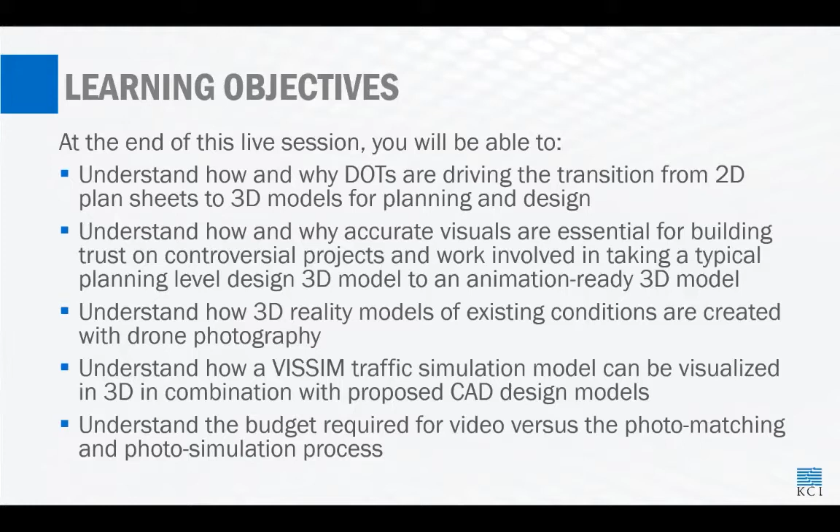Understand VISSIM traffic simulation and how that can be visualized in 3D through an example we showed today. And talk about the budget and understand the differences in products that you can create appropriate to your budget to communicate.

I want to focus today on 3D transportation visualization. These are the 3D data products that are becoming more and more available, and 2D products are something that I think we all see often with the aerial photo in the background. It still is a 2D and not a real view that you'd actually see in real life.

Public involvement opportunities are out there with this 3D data that's out there, from concept planning all the way through final design and construction. I'll talk about some of those phases of different ways to use products.

The target audience, it can be the whole general public, like open to the public, specific people and agencies who are decision makers, focused community groups. It's up to the client, typically a DOT or agency, or whoever's funding the project, to determine that and focus on that.

Goal is to honestly show in the way it's actually going to be the benefit and also the impacts of projects, which of course people with transportation are always concerned about new traffic patterns and how that's going to change. And that's where the VISSIM, you'll see, comes into play.

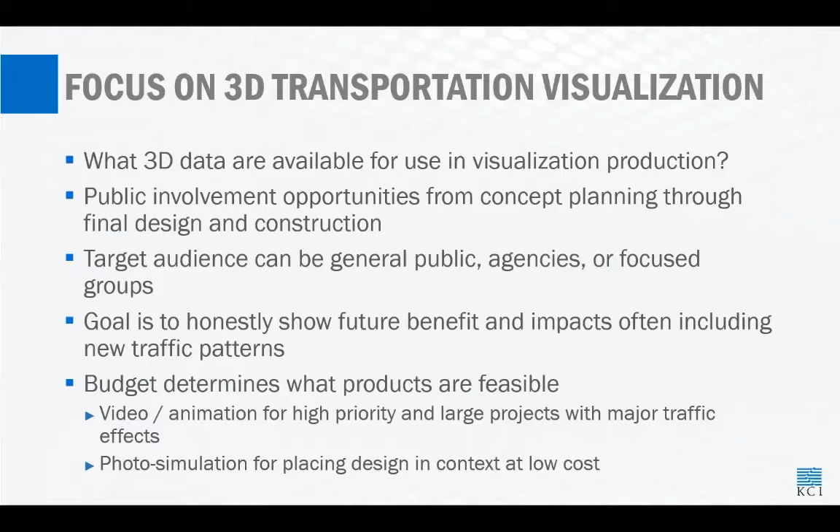As engineers, we're always looking at 2D, picture type of engineering views. Photo simulation is how people actually can see and recognize things. And that's a big priority, is making everybody understand, or as many people as possible understand, what the future is going to look like given a major project, and how to usually get them on board with the benefits.

So the different opportunities where it's going to be appropriate to involve the public or involve a target audience, to me that kind of is the same category. You're taking someone who's not an engineer, people who are going to be part of living the project, they're interested in it, or the agencies and groups that are kind of stakeholders.

You can start out in the very beginning. You have things like visioning, a technical assistance plan in these community groups that are looking at way into the future. And also they might get involved with influencing, or any town or city has comprehensive plans that they put together, depending on how big the city is or town is, how detailed they sometimes go. But they all have their own comprehensive plan, and that's an appropriate place to use some of this 3D visualization.

A big one focus on today is NEPA. So this was signed in 1970, Nixon, and that's kind of was as a result of an awakening, or more of a concern, especially about impacts of projects environmentally, but also on the social and economic effects. And that's what the law says. You need to look into those alternatives, because underlying everything with transportation is eminent domain.

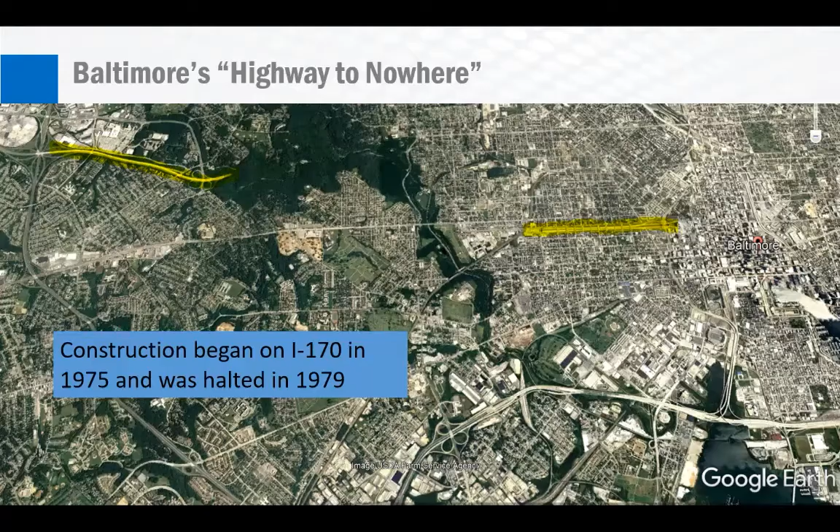What happened over time is that the project, even though it was getting built, had a huge community blowback, where they didn't like this project. It had a lot of impacts to the community, but also environmentally. It was destined to go through here, and because of all those things, the project was halted. So it's the famous highway to nowhere.

Now, here it is, and these are Google Earth images. The MARC parking in 1994. So this highway to nowhere went to here, but there is a MARC station here, a pretty important stop connecting to Baltimore. So they had the parking lot in 1994.

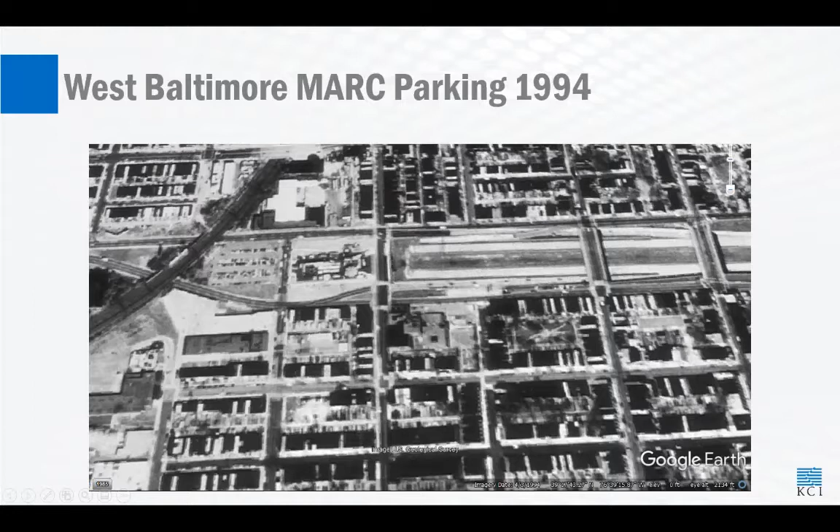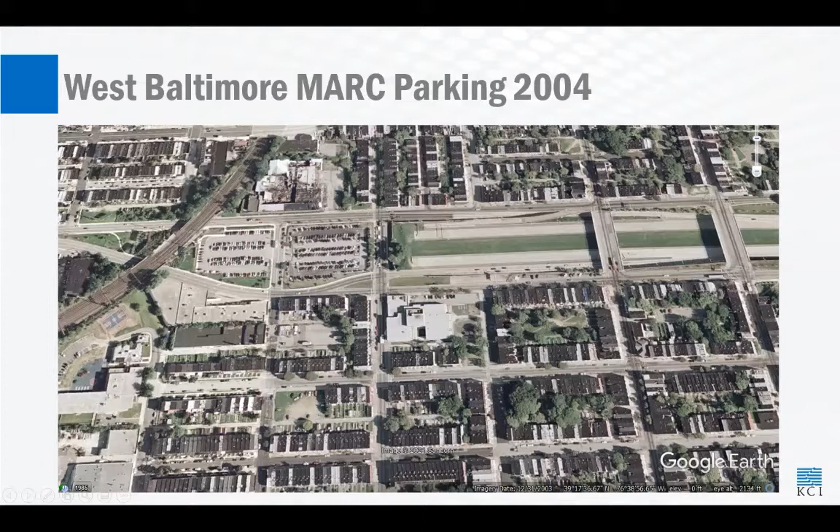And here, of course, is the highway to nowhere. Going forward, they expanded it, and you can see it's totally full, because it's a good commuter route. So we start to see opportunities now to take this and turn it into something that will help the community connect, giving economic opportunities through the traffic and getting people in there.

A lot of people worked on it. And this new parking lot, and then the ramps were all adjusted and a lot of roadway work in order to make this road connect. But what we got now is a large expanse still remaining of the highway to nowhere.

So we skip forward to today. There are people working on visioning of what to do with the rest of this now. It's essentially turning it into more parking garages, businesses, connecting instead of having non-connected communities here. There's a lot of ideas going on.

And these are opportunities that are mixed intent - like in the planning, in a comprehensive planning stage, you're planning for economic benefit, environmental and community benefits. It's not just about transportation. So it's kind of neat - that's how it's evolved with transportation.

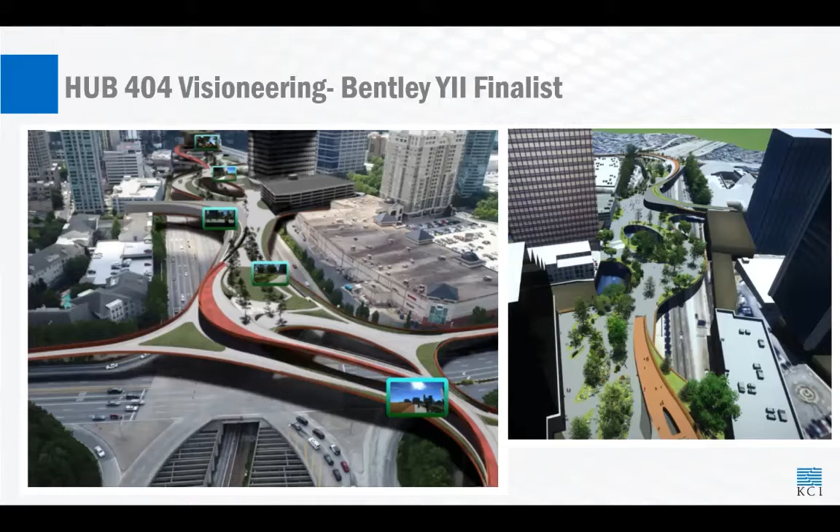It started off more transportation focused, and then it became more about the context of the community, the context of where you're putting all this stuff. Here we've got this Hub 404 Visioneering, which was a Bentley finalist project, and James Clay worked on this. It was a community group and visioning type of exercise.

Hey James, are you mic'd in here? I will play this video, sir. So this is James Clay down in Georgia. He's a visualization and data survey guru. So here you go, James. This is our...

Bentley finalist. Excellent. Well, this video was all about, they're going to build a large park over Georgia 400, which is a major highway that runs through Atlanta. And one of the things everybody wants to know is, what's it going to look like when it gets finished?

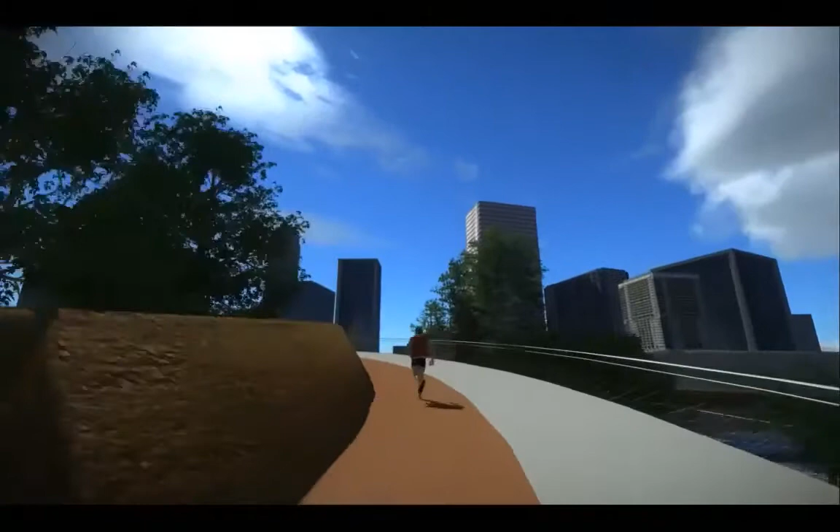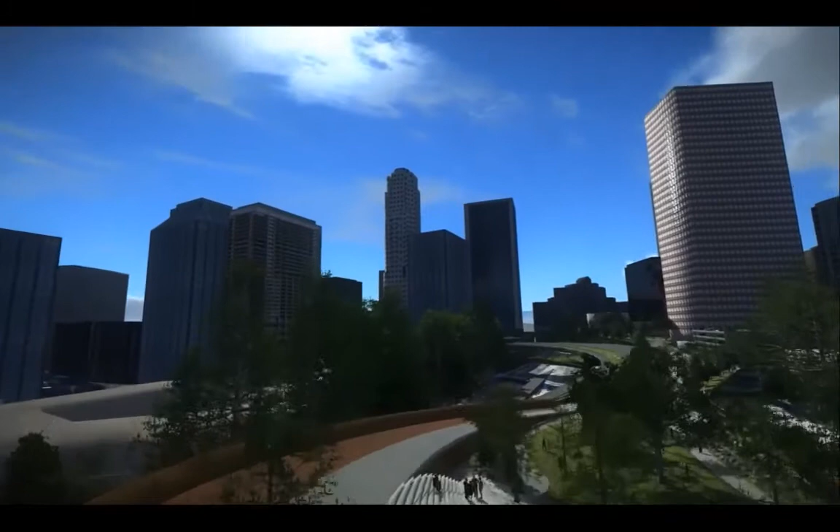With your client, there are specific things you need to go over to make sure you understand their vision. Here they did supply us with a basic model, and then they told us, hey, we want it to look like Georgia red bank clay where people are going to run up and down the trails. So we took their basic model, texturized it, put in the plants and everything. They didn't really have a landscape plan, so we kind of came up with it on our own.

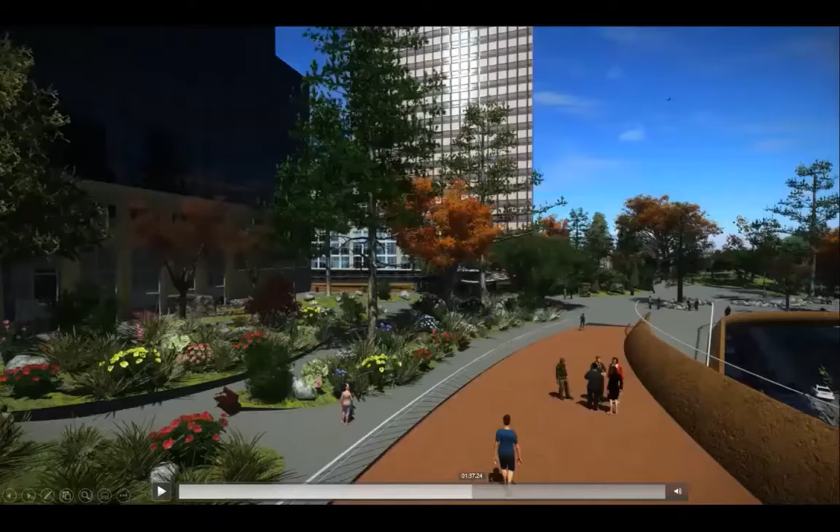But nonetheless, we were trying to show existing conditions that we were capturing in the field. Our survey teams, with mobile scanning and things like that, were capturing the existing conditions, and then taking this proposed model, putting it on top of those conditions, texturizing it, and making a fly through so that we could really get a feel for what it looks like.

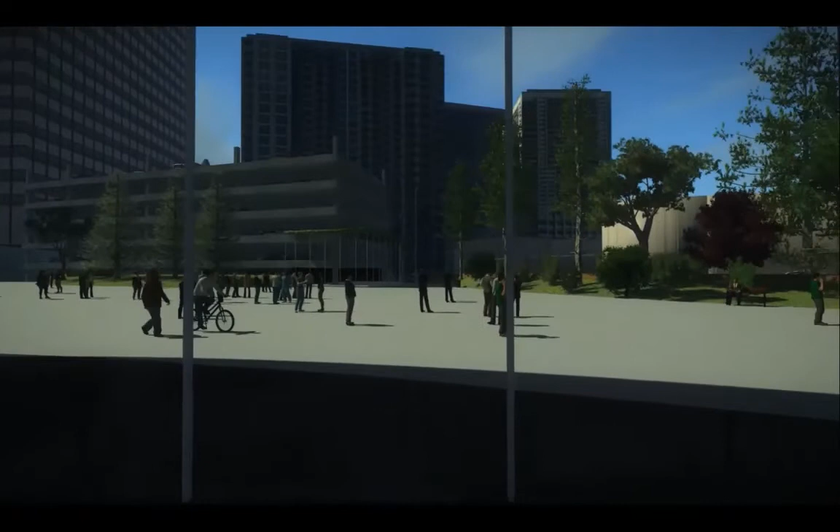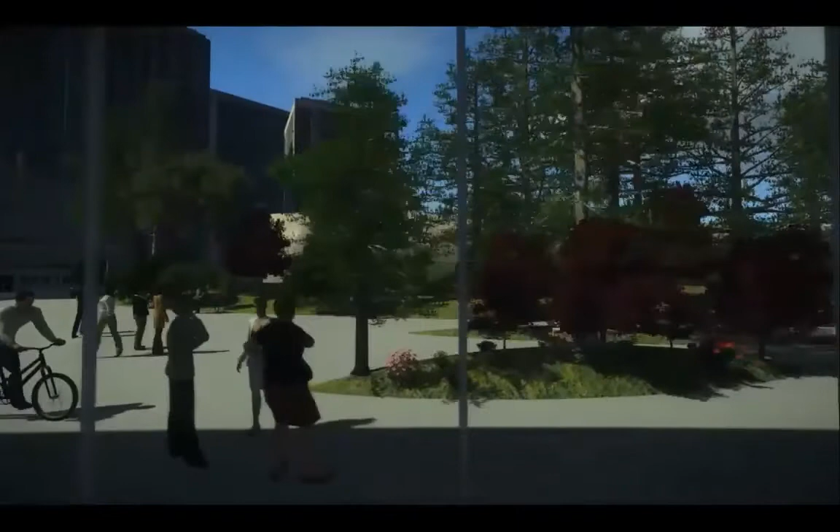MARTA was the major transportation system that runs through Atlanta that was included in this. Here's a screenshot - part of the video shows MARTA was really concerned about what they're going to see out of their windows. So again, back to the vision of the client, we let it just scroll through, looking out the windows of the proposed MARTA station and showing exactly what they would see outside and how it would interact with that whole park view.

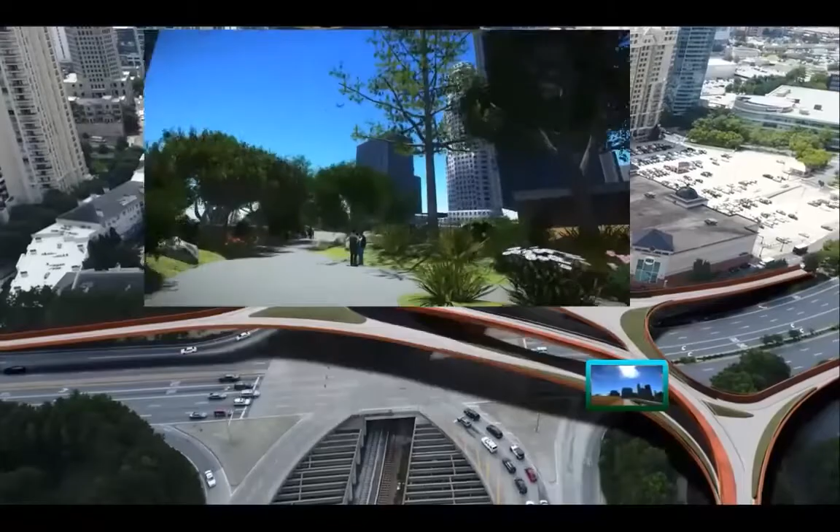Again, I can't say visioning enough. It's just important to get in touch with your client and understand what they're looking at. Do they have hand sketches and things like that ready for you, so you'll understand what they need to see? What we like to try to do is go ahead and get the whole site storyboarded. So if you can get the basic information from them - hand sketching, landscaping, things like that - you can storyboard all this information together.

Do they want narration? How long is that going to last? Let's get all those things up front. And then once you have all that information, start building the world. On some of this, you'll see that we're using real video footage, and we're blending in the model with that, using some specialized camera tracking where you can do that.

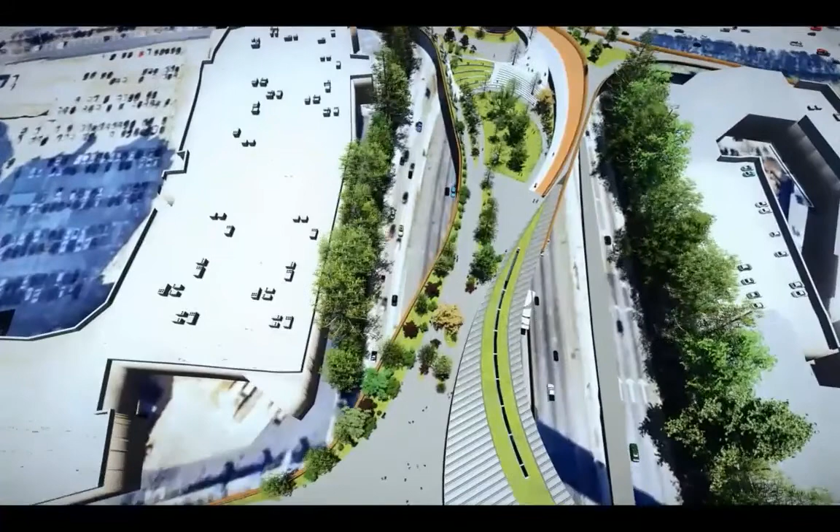But again, how real do they need it to look? What is the final goal? You have to balance that with your client - we can make it as real as you want, but it costs a lot more money. Just putting in the basic textures and things on a blank model does take quite a while, so we really need to decide what you're going to receive from your client and go over that with them.

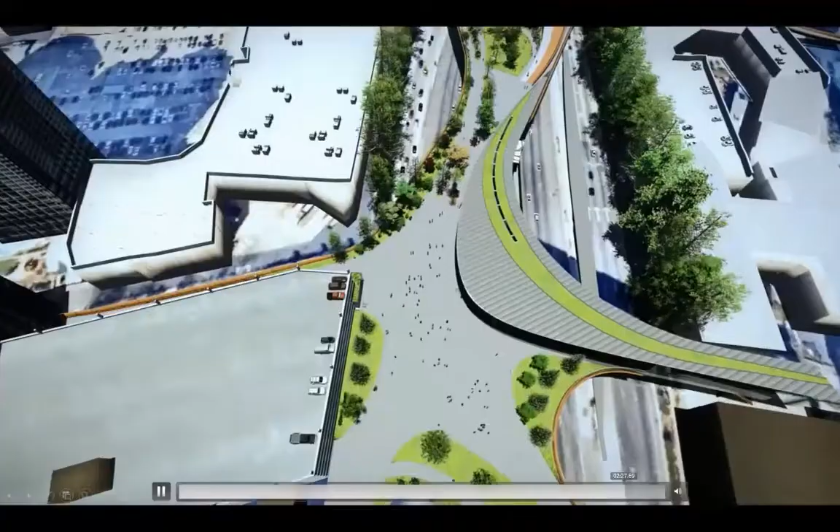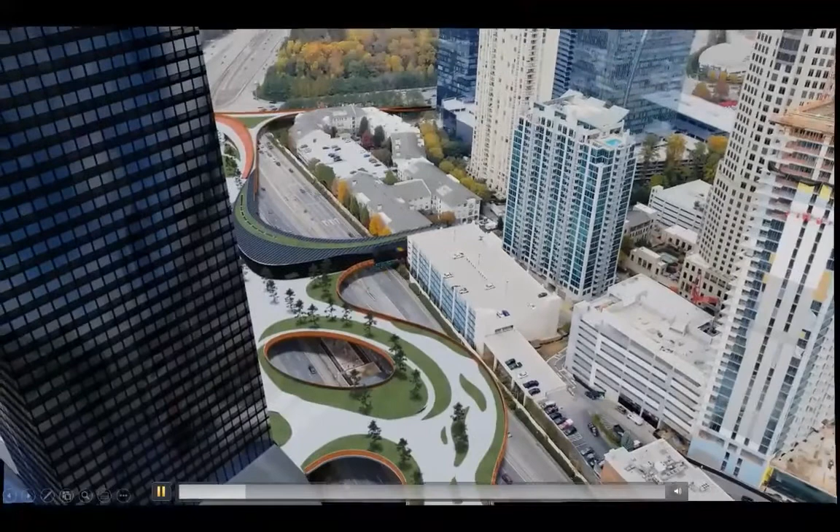I guess what we need to learn from that whole video is, it's powerful - you can see what's going on. The client got a lot out of it, and they were able to see what the final product looked like. They took this to try to get more funding for the project, actually. It's just making sure that you understand, and the client understands, what they're going to end up with and what they're looking for, up front.

And put the video in front of them quite often. Any world that you're building or anything like that, make sure you put that in front of the client. Don't go so far that you're almost 90% complete before you start showing the client. Give them time to comment and provide feedback.

Just have to build all that into your budget and into your time frames, just to make sure that your client ends up with what they need to see, where they can show, in this case, to the public and or stakeholders, end up with what they want.

And there's so many details that you threw in here architecturally with people, and again, it's like saying it's not just about transportation. This is about community, and it's kind of a wild idea, but that's how ideas begin. It's going to warp or change to something, and the concept is there of connecting the community.

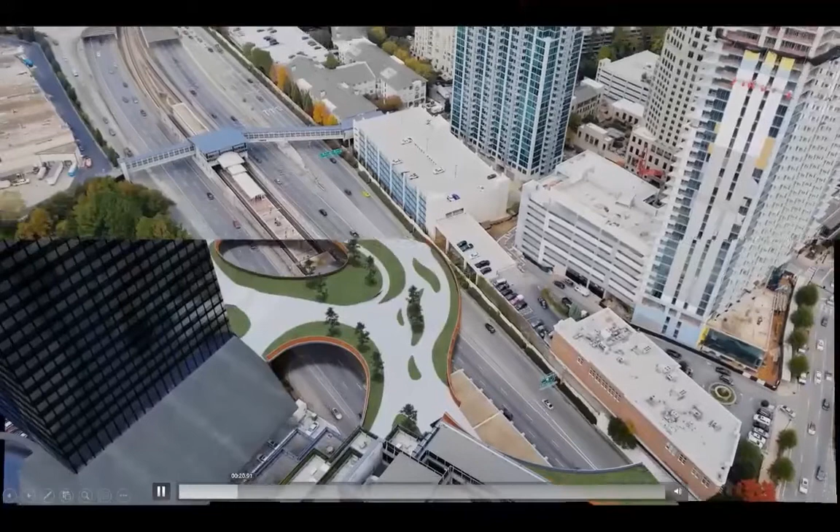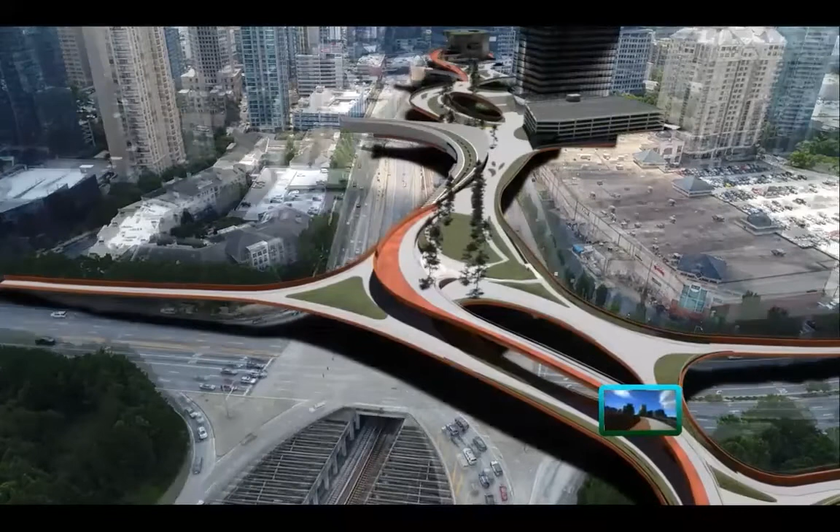Very cool project. And so you were mentioning the matching with your drone camera, and that's the technique you used right here. Yep, and actually they wanted to see—there was a major stakeholder that had a condominium, he owned one of the condominiums at the top of that tower right there. So he wanted to know what it was going to look like from his deck. So we got a drone in the area and took some video footage to show him, hey, this is what it'll look like once they finish it. So he was satisfied.

Awesome. And James, continue to chime in whenever it's that part of the project. As I go into the technical side here, we'll get abstract for a second. You did the visualization products, and you also did an enormous amount of data collection on the 3D side via drone and LiDAR. That's correct. Yeah, so to help us build that existing world, that reality capture, we were contracted to do all that first, and then set the proposed design on top of it.

Right, and that gives them a lot of data to work with, even if they change down the road, as new designs, new ideas come into the field of view. And so data is so important, you're showing something accurate, at least based in reality. Even though it's not an exact science, it still is an accurate science that we're trying to do.

So you start with that. That's a good point. Yeah, because the accuracy is survey grade, which is very high accuracy. So what you're seeing is a lot of what is going to be, at least until they change the design—something they decided to move around—but what we were producing and what we captured was survey grade information.

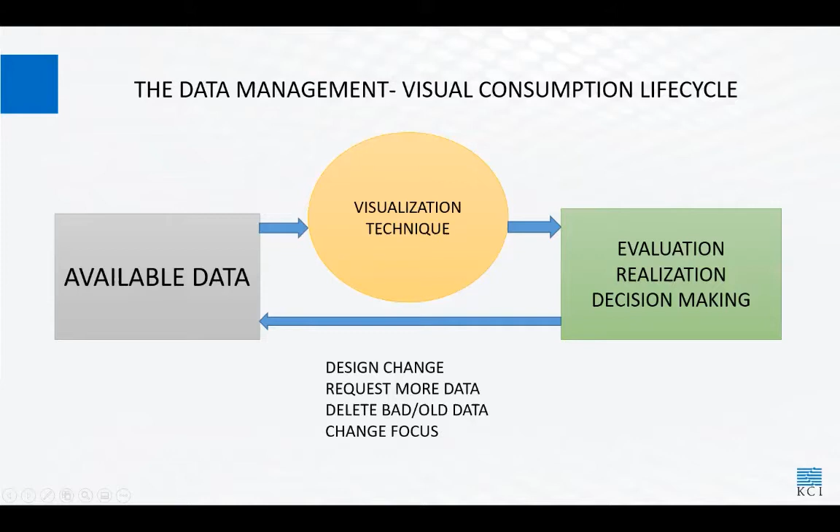So in the bigger picture, James has experience with a lot of the 3D data on survey and visualization end. My experience is more on the design side, being a design engineer, transportation engineer.

The whole DOTs are transitioning their design software towards 3D. If you were me 20 years ago, you were kind of doing 3D with InRoads, but it wasn't as complete as it is now. These tools get more and more sophisticated for 3D and more intuitive to use, especially to teach somebody new, and they're transitioning forward.

So in the big picture, you can look up everybody online and see that they all have a 3D initiative, from the Federal Highway down to all the different DOTs. Even though they might still require some of them, they're eventually going to get to Open Roads Designer, but many of them now are still requiring GeoPak or InRoads as what they say is their deliverable. You could go state by state and look up their websites to find out where they're at. They usually have that clearly stated.

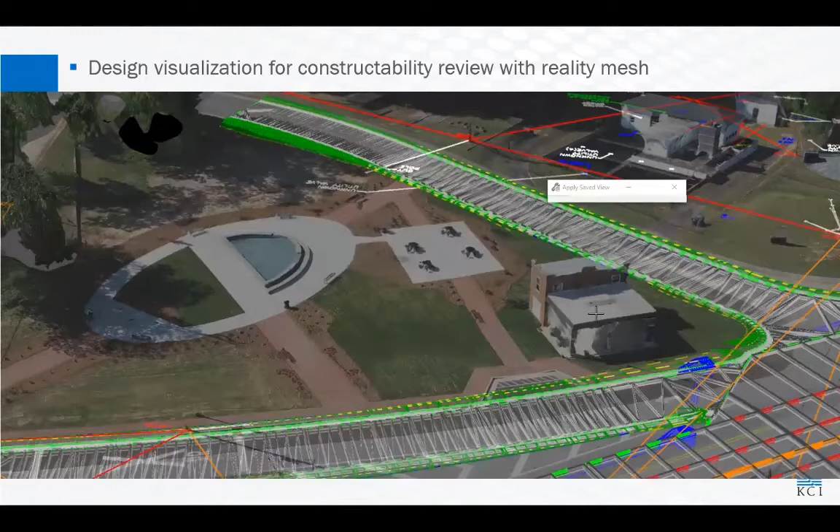As we're looking into the future, we see the reality mesh not just as a visualization product. It's definitely a great thing to get to 3D. Let me play this video for you.

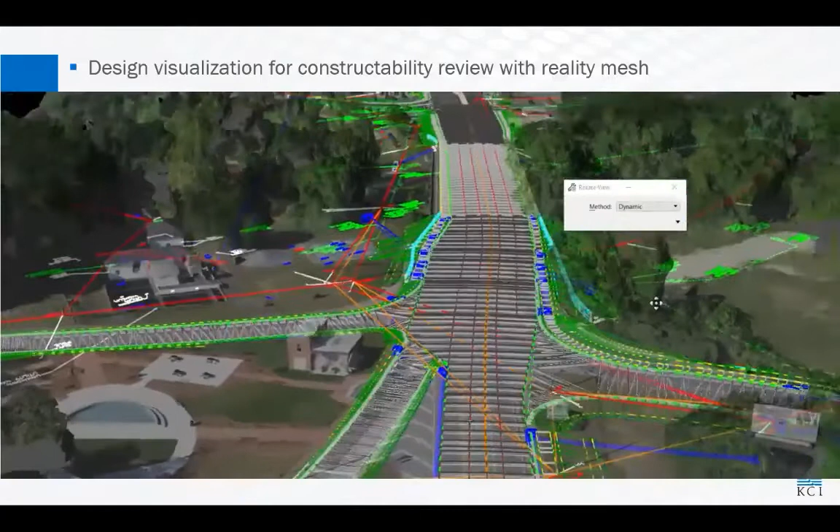Even in a design scenario, here's Georgia's Open Roads Designer workspace, where all of their utilities from their standards are modeled. Their pipes and their inlets, all of these components, the various pieces with the road, they have standards you can use. And here you can see when you put a reality mesh behind that.

It's a tool that is coming of age really in terms of existing data. Instead of lines and points and maybe shapes, you're talking about a reality mesh. Keeping that in the back of your mind, even using that in design is going to be something you'll see, but it's definitely key in visualization.

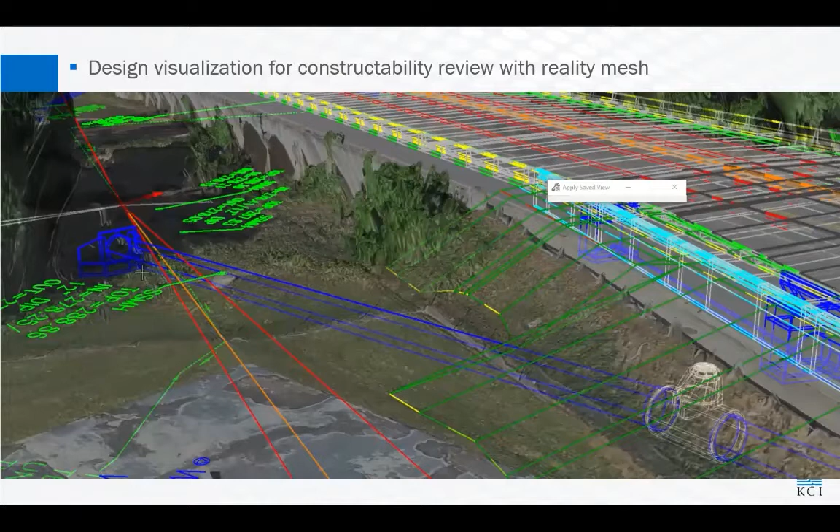You'll know on Google Earth you can turn on the terrains or the buildings, and you basically get a reality mesh if they have the data there.

Okay, so now getting to the product that can really educate you on the whole big picture of putting all this stuff together, recently we worked on a simulation video for US 278 Hilton Head. This is a big deal project.

You'll see when you watch the video it's quite a large change, and there's a lot of interested people throughout the corridor. So for this public hearing, they actually had it in person briefly, a good window where COVID had settled down, but they also of course had it online.

This just recently, beginning to mid-July, got released. They have an online virtual room, like a virtual public hearing room. If you just search this, you'll be able to pull it up, and you'll see you go into a little room and can click on different things.

I just wanted to mention, it was funny to me, or kind of affirming of why we're doing simulation, that a video in there, the alternative analysis video, when I clicked on it, it had 10 views until I hit it, then it had 11. The simulation video has 2,692 views, to be exact, and it also seemed to have another link with another 1,000 views.

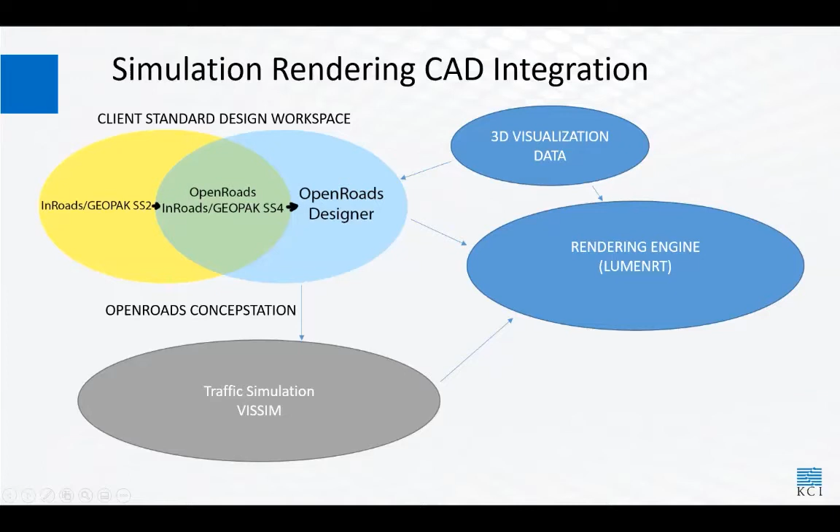So let's go ahead and crank this up. Now let's listen to some of the audio in the beginning here before we talk.

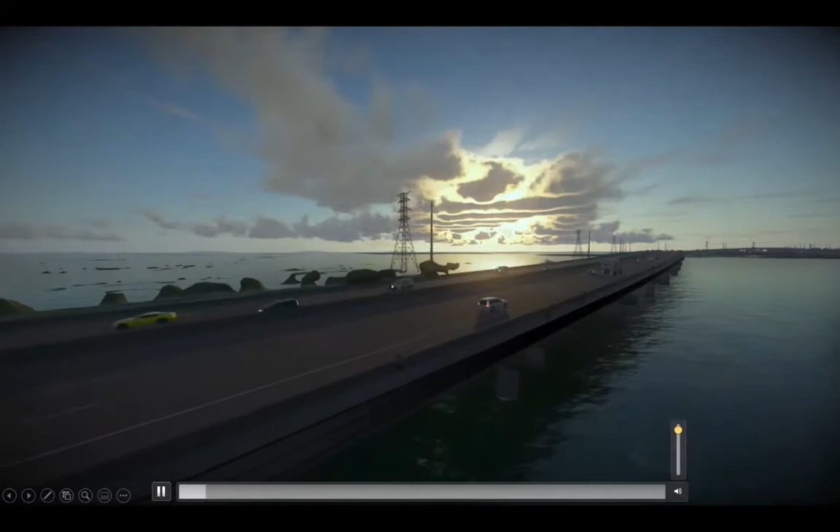I can talk a little bit about some of that if you'd like. One thing that was kind of interesting to me about this project is that Cyrus and Pong and Weiss and everybody had put together a lot of information to provide to our team so that we could start assembling the final renders and things—big bridges, long roads, lots of big intersections and things like that.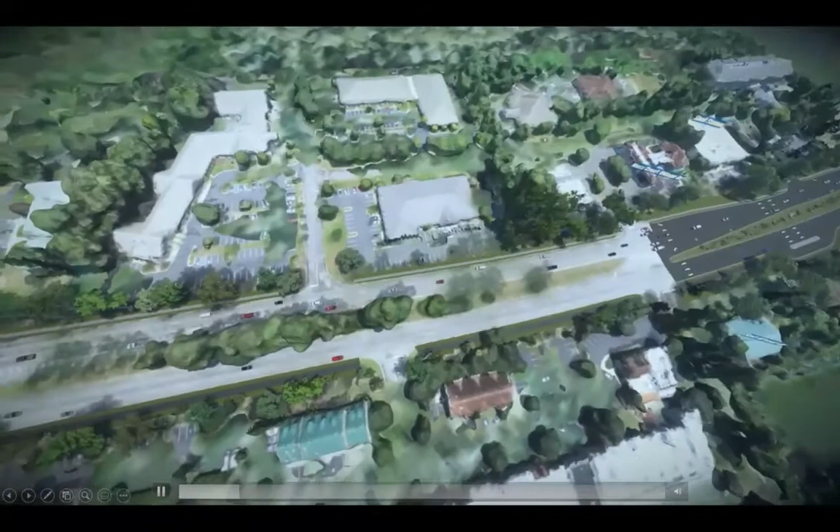But then when we started watching some of this—and again, make sure you bring your video to your client early so that they can make comments—one of the comments was, hey, down there near the first bridge, we've got a boardwalk that's going to be right along the edge of the waterway there, and we're not really showing that. How can we draw attention to that? Like, oh wow, how are we going to do that?

Because it's really kind of small—it's long, but thin and small. When you're flying above this multi-mile project, it's kind of hard to see. So that's why we started off and said, well, we'll just put a jogger early in the morning on the boardwalk. And in the end, the client really liked that because, hey, look, the public can see there is a place that they can access this whole area with.

And then we put pedestrians and things on the bridge in the walkway that Cyrus has made sure he modeled out of the design. So that kind of all went together. And you can see Pong's traffic simulation running in the background.

I'll pause for a second here. In the pedestrian area, that's a totally new facility, so that's a huge benefit we're stressing. And then you had the narration in the beginning, so let's play how we open it up.

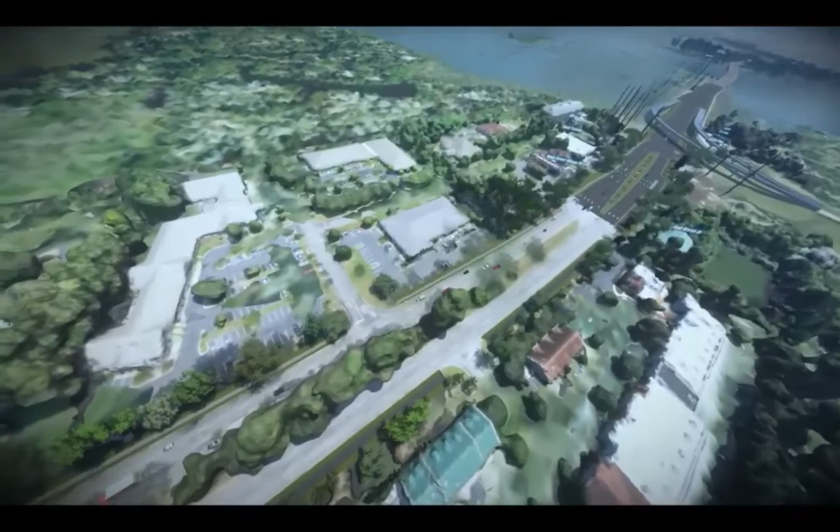This project begins in Bluffton at the intersection of US 278. Between Moss Creek Drive and Salt Marsh Drive, the project would not make any changes to the roadway, but would add bicycle and pedestrian facilities along US 278.

And if you watch the traffic, you'll see that it's doing real things. It'll change lanes and things. If somebody's not used to this sim, it is pretty impressive. Exactly, yeah, the traffic all populated.

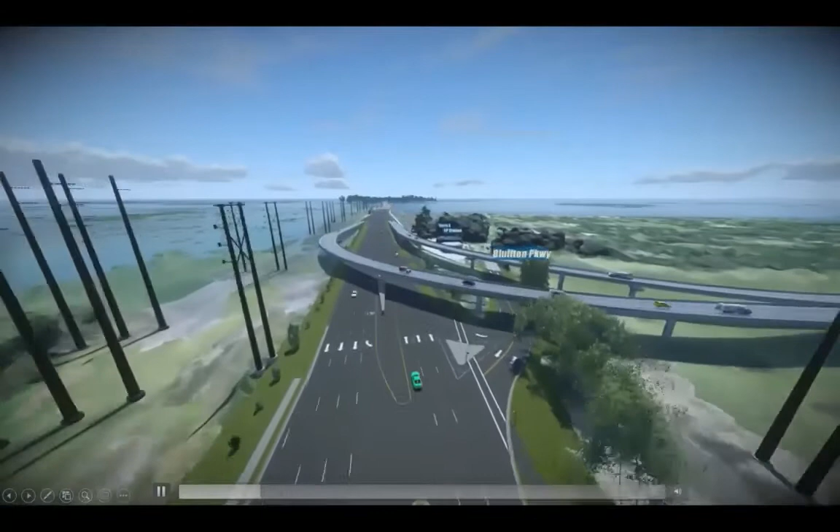So all these 3D motions I served out with Concept Station. There's tricks to it, believe me, and getting into the details and the weeds, we just don't have time to do that today. But the basic thing is Concept Station serves these in 3D.

And the natural thing that VisSim does - oh yeah, there we go, see that? I love that stuff. It's a broken down car. Random things will happen, and then the cars will act the way they should when they see random things.

And yes, hi, this is Pong. Hi, Pong. Hi, Cyrus. Hi, James.

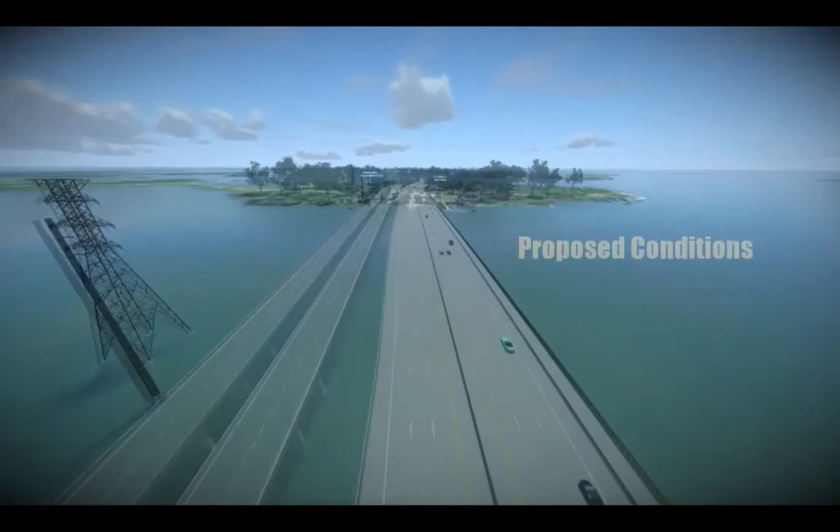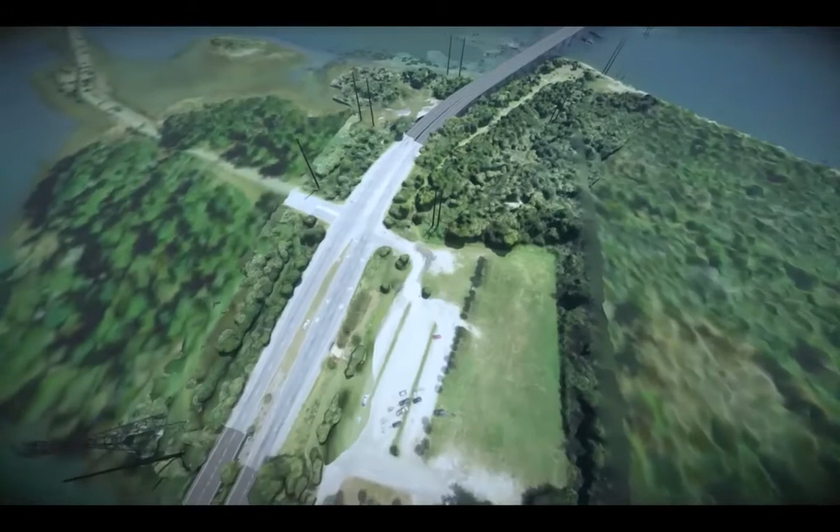You're absolutely right, VisSim's strength is traffic operation and visualization software - that's the strength of it. The vehicle to vehicle interaction, just like what you saw, that a car behind a kind of stuck car trying to make a lane change to go around. That's one. Also the interaction between traffic control devices like stopping at stop bars and yielding at incoming traffic, and stopping at signal intersections. And if we have transit vehicles and pedestrian bicycles, we will, as we do in urban settings, see a lot of interaction between traffic and transit, and ped and bike as well. So that's the strength, the reason for bringing VisSim into this effort.

Indeed it does. There's no way to animate that. Near the end, I have a video I'll show that doesn't use VisSim, and you can see some of the stuff about that and how it's different, and definitely not as good.

So yeah, we've integrated these things, and I wanted to keep this running as we see - oh, this is a good moment. The trees and the details, and things like the signs for the communities, are really important, so you have to allow the budget for those things. The reality mesh and the existing environment...

James, you created that with drone flights, and then also aerial photo as we get further away from the site. That's right, yep. And the good thing is, because everything today is geo-referenced, that goes together pretty easily. Our UAVs all have GPS.

The aerial flights are GPS, our survey data on the ground - and because we georeferenced everything, we can just assemble that into a database that you as an engineer use to make your design on. So it makes this easier than it was in the past. And like you were talking about earlier, the tools continue to get better, so as we go further it'll be a lot easier than this one was.

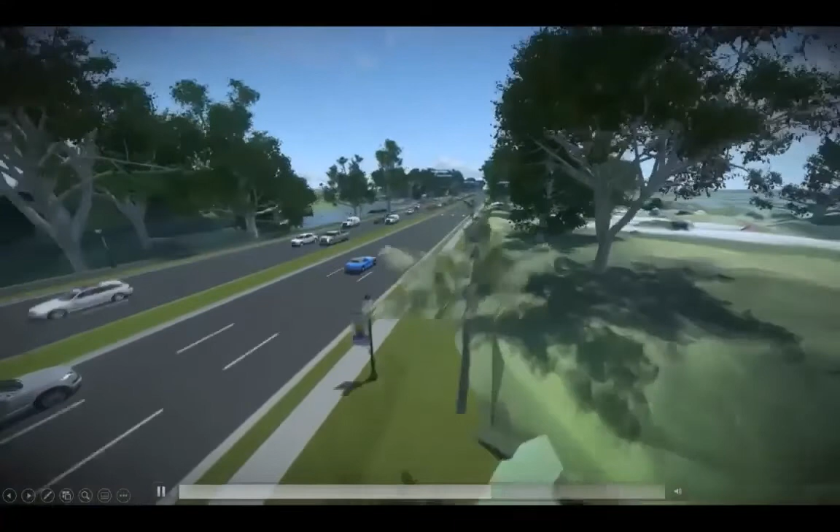And then more details of these street lights and the community signs and things like that. And again, there's so many little water details that happen along the corridor that you capture, and the homes - all reality mesh. If that wasn't there, I think it'd be a big difference, it'd be harder to create all that.

I'm back like 20 years ago or whatnot - I remember having to create my existing, whatever I had to show, not just create, but literally draw it up and create it.

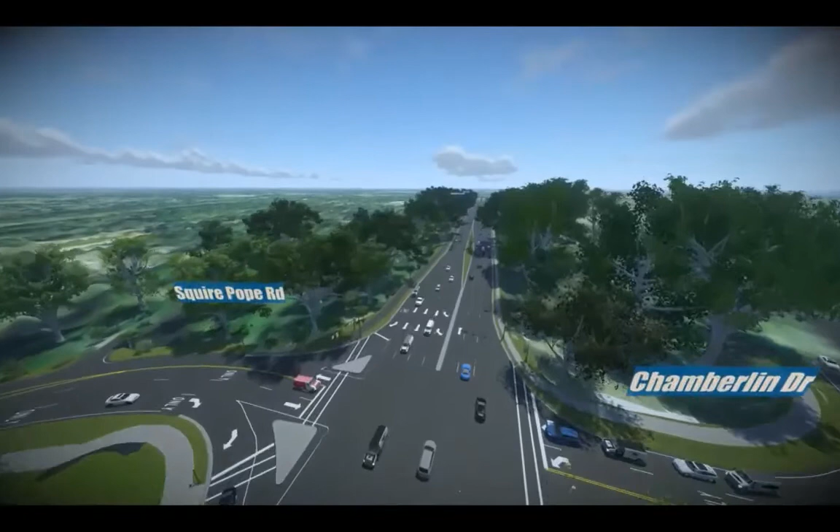One thing that was good about showing it so often is that the client was able to call out things like, 'Hey, the crosswalks need to change.' Cyrus had noted that even in their design, they had drawn the crosswalks, and they said we didn't have an area in the middle for them to stop because of where the crosswalks were placed. Because the design engineers had looked at the video early on, they said, 'Wait a minute, we've got to make a design change.' Cyrus went back and updated his design. He had used their design but was making it 3D, since they had not really done it in full 3D. So then he updated that information.

So it's powerful, and the public wanted to make sure they could see this U-turn. Hey, can you go back and change your camera? Yeah, yeah, that's totally different.

You guys got to go online to see it if you want to really get the audio, but she's describing the various changes. Look, you really see the traffic operations of this sim. Right turn lanes from US 278 stay the same.

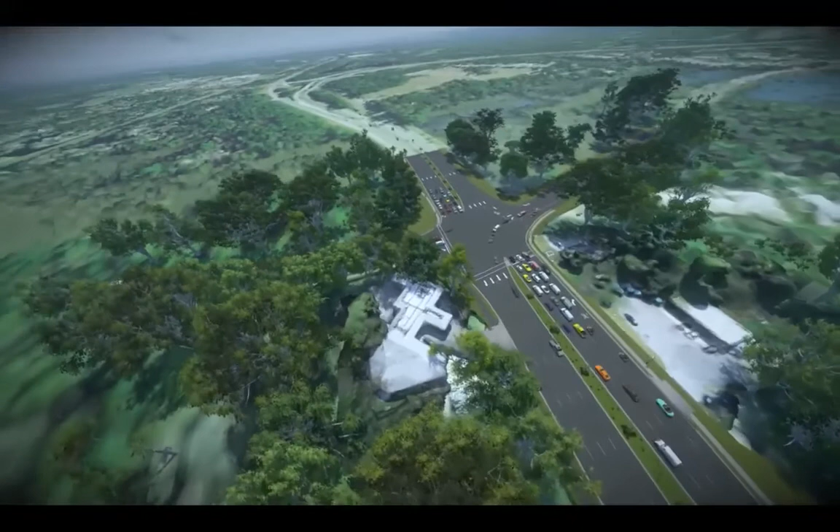That narration aspect of it, getting that out early and knowing what your client wants to see, getting that on the board early for you when you get the client's vision. Get hand sketches or whatever their proposed ideas, look at the design, are there landscape plans, what's the final vision, how accurate and how detailed does it need to be? Accuracy is the goal here. We're trying to give an accurate view of what the final is, but how detailed did that information need to be? In areas where they're going to zoom the camera in, let's put a little more detail. If it's not going to be zoomed in, we don't have to worry about it as much. Get that all put on a storyboard, get that narration up front so that you're not making a lot of changes at the end of the job, changing your camera views because the narrator is talking about something your camera isn't looking at.

It's important - if you do get a chance to see the video, while you're listening to the narration, the camera follows what she's talking about. That really helps with getting that in front of the public.

Definitely, yeah, and we get that. I'll move forward. You brought up a great lead into what I'm talking about now - the actual design, what they give you as opposed to what you see in that model, and how we're going.

I gave you a basic overview of it, but there's a transition. Everyone's into 3D modeling to a certain point, even in planning, because the requirement is to show the impacts, cut and fill lines, what's impacted. You have to set a profile, and the best way to do it is the model. But if you see here, this is how the models come together at the rougher stage - they're just pieces mostly concerned with impacts, not with everything connecting perfectly like a final design would be.

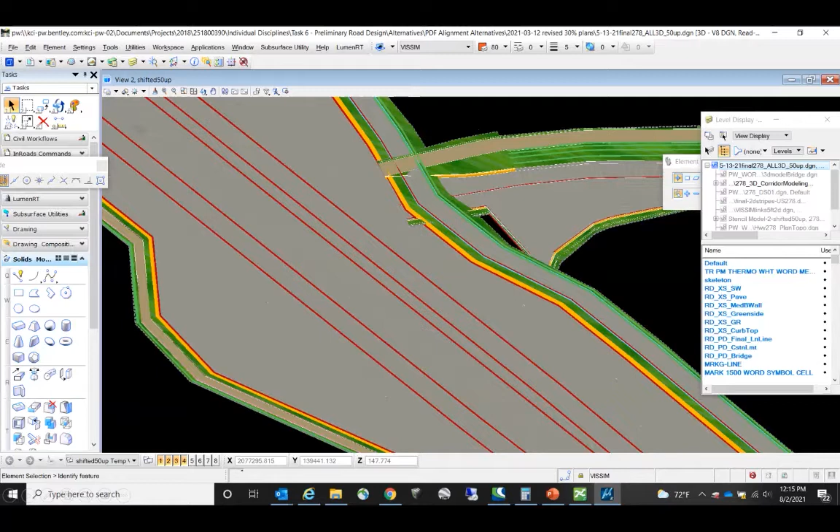The method I'm going with - basically you grab this area and just kind of pull elevations and draw lines. I call it the skeleton - see that level called skeleton? Then I'll take the 2D and drape it on there. Then you have to actually model the various things like a curb, etc., and then fill it in. That was the method I used. I liked how I used their models directly, but it was time consuming, since recreating the most difficult things is what I ended up having to do. Here's another intersection.

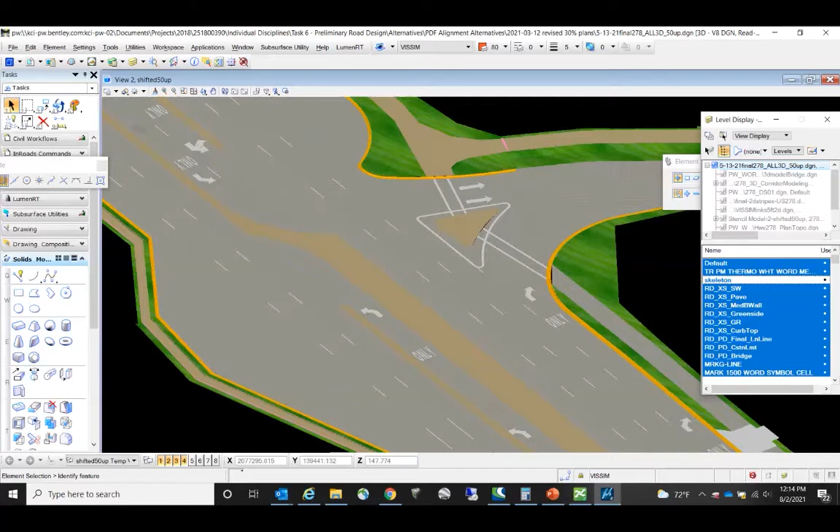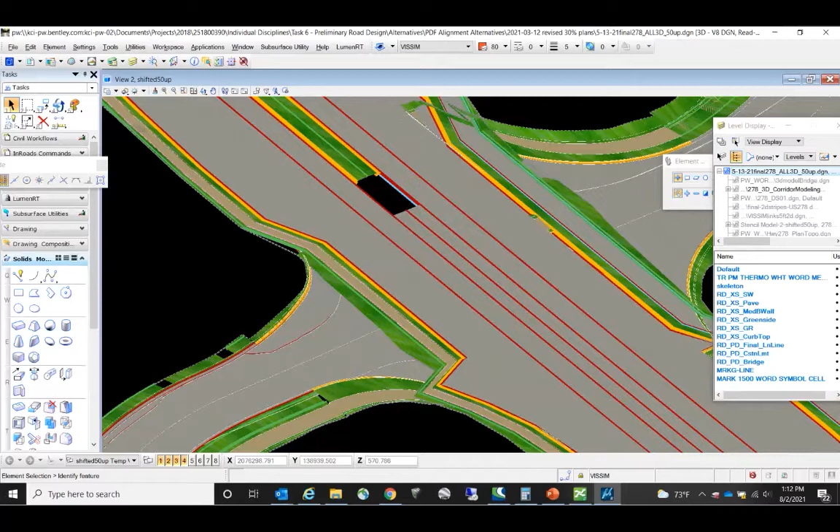But it's worth it if you can say that, at the end of the day, our model was an exact replica of their design, except for perhaps that one crosswalk or other tiny things they wanted to change. It's really supposed to be the same as the design in the NEPA documents.

Same thing, a lot of details getting filled in. This time factor is a big influence on cost, and there's a lot of opportunity if you look at the future of this cost going down. On a parallel track, something I'll teach you about, maybe in another seminar, is the design side of 3D modeling, just thinking about design. You do model these things, and there are also other tools just for planning.

I'll give you guys the ConceptStation. It seems like if that would be the acceptable way to do NEPA, that would be fantastic, because it puts all the intersections together for you in a visual form with stripes and things like that. There are a lot of emerging technologies that are going to cut down the time on this very tedious process I had to do here. My expertise is pretty high too, so it's not as if you can just have any brand new EIT do this.

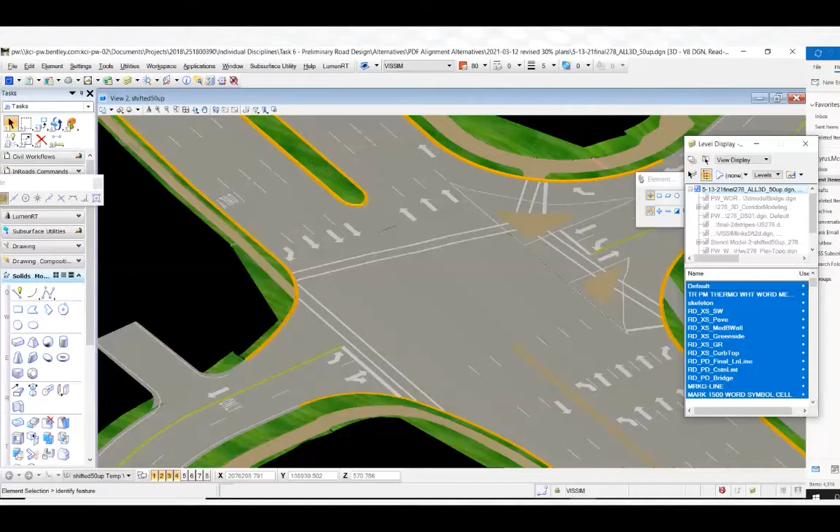So we want to find ways to make it quicker, and we are, every day. Again, the data you start with depends on what you have to do. Considering that is important, especially when you have the opportunity to do the modeling and the visualization. In this case, CDM did the GEOPAK and we visualized it.

Now let's talk about the budget and transition here. I got into why it's such a high budget and a lot of work, and we were involved in all the different phases of it. That's because we had basically the highest budget type of product, which is a video animation that has existing and proposed conditions.

Even in our case, we have to say this isn't Hollywood on that large a project, because the tools are meant—honestly, we're using the same tools that they'd use in Hollywood type productions, because that's where the technology is at. You render things in these rendering engines built to do it fast, that's what's out there. So it's built to render images fast, but putting everything together can take a lot of time and hardware and everything else.

So with video and animation, you have the biggest chance of overrunning your hardware or time capabilities in simulation. A lot of times on a smaller project that's still large enough to demand some communication, we'll use still images, photo simulation, putting that into a still image. Even though the downside is you have to focus on one area, that can actually be good, since you're framing what you want to show them.

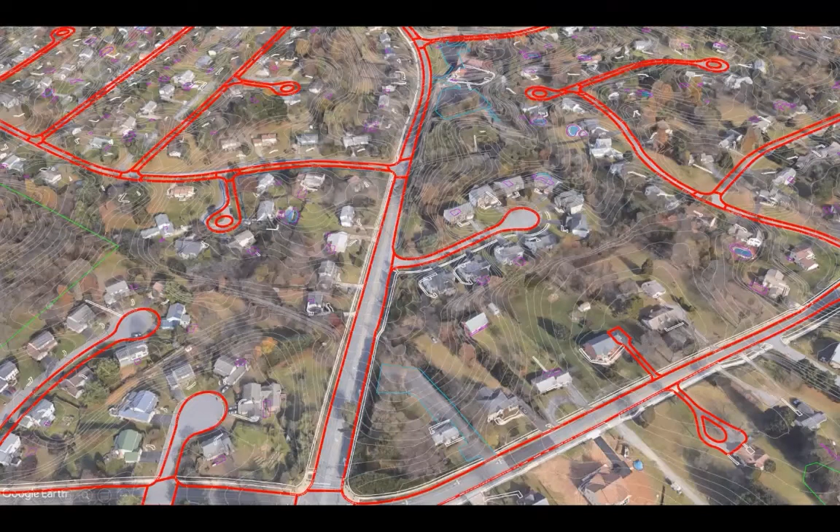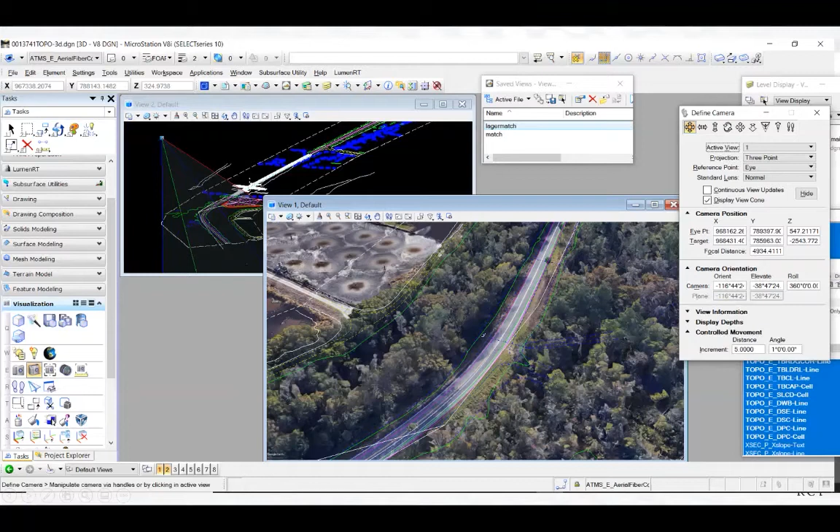Here's a quick example to give you the technical background. If you pull out a Google Earth image with 3D buildings, you take your data and put a camera in MicroStation, calibrate it and line it up as best you can, then take your proposed model and put that in to show the change. Your cameras have precise information just like a real camera. When you calibrate and overlay this projection, you get to the point where you see the existing 3D overlay in the photo, and then you just turn on your model.

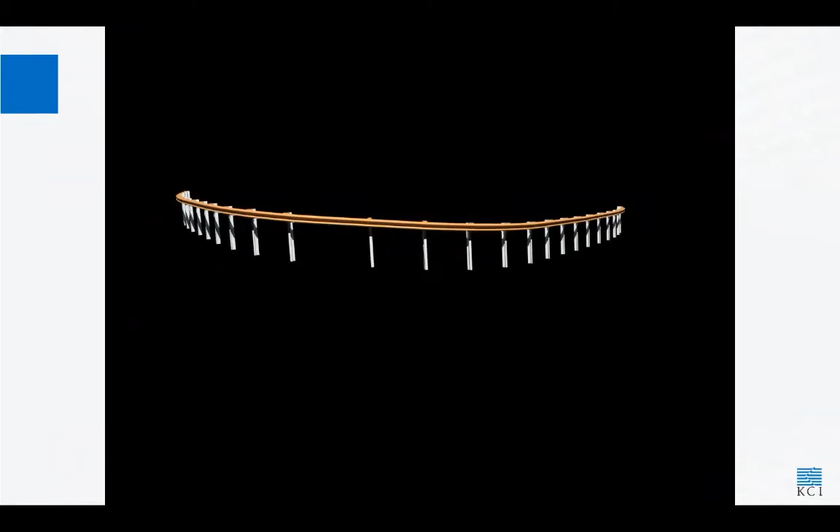Here's a close-up ground photo example. The data is available, but perhaps not in tons of detail—still enough that I can go by the plans and model every post pretty much the way it is in the plan, the guardrail to the standard. That's just what I modeled; I didn't model anything else. Beyond that, I tweaked it because the photo matches aren't always perfect due to data limitations. You can see it moved a bit, it's not the same shape—I had to tweak that to match the photo because we're keeping existing ground here.

But these guardrails—the community wanted an idea of what it would look like, and they have the brown aesthetic treatment to help it blend in more, and wanted to show that. They have a big installation of utilities, electric, and I think water supply related stuff here, big cabinets, and it has to be protected. So they wanted to make sure the community saw this, understood it was needed, and that it would look decent and functional.

Here's one you'll see a lot: a drone photo of an interchange. You get a really good view of how the whole interchange works and the surrounding buildings, as opposed to the straight up-down view where you're not going to see the bridge. If you're not an engineer, it's not going to be easy to tell how the bridge is elevated and how everything ties together and where it is on the earth. Here's an example we did in South Carolina.

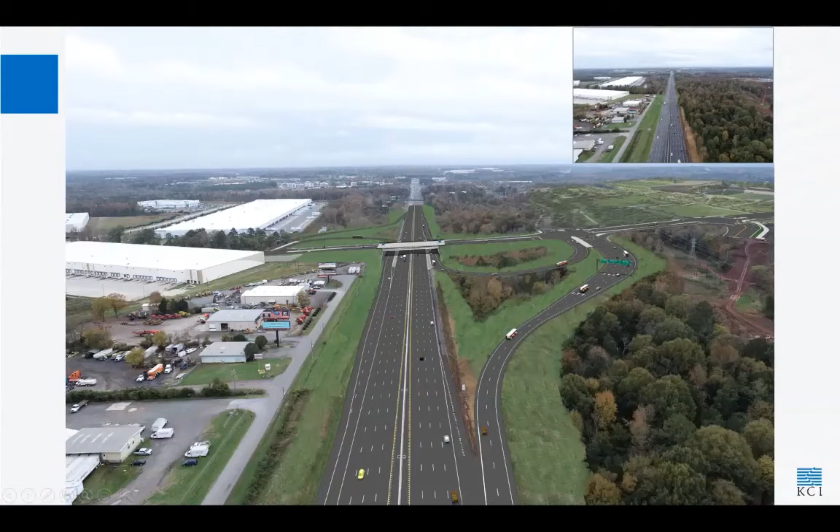Just moving through more examples of photo simulation. Another variety is when you've got terrain data—for Maryland, they have LiDAR terrain data and pretty good high resolution aerial photos, all available to download. You put those together and make a reality mesh, but a different kind—it's made up of a flat surface. You can tell the trees are plastered to the ground, but you still see the relief. You can see that giant creek canyon going in. And so this is the existing bridge.

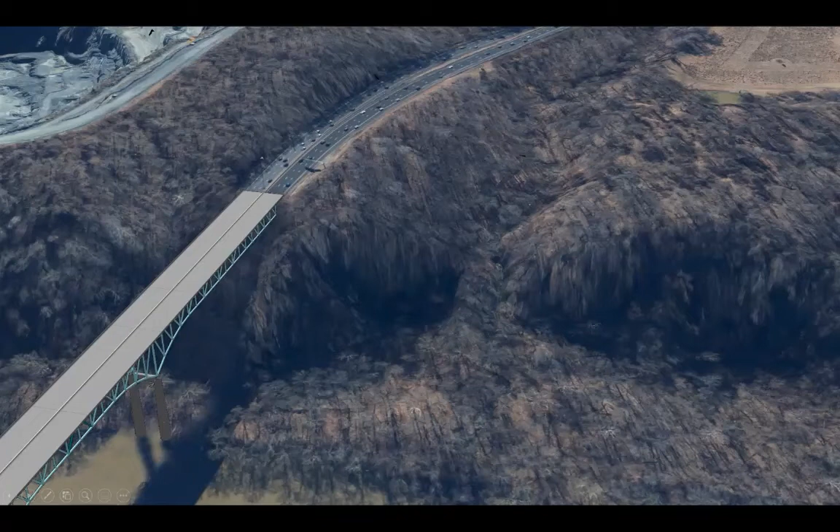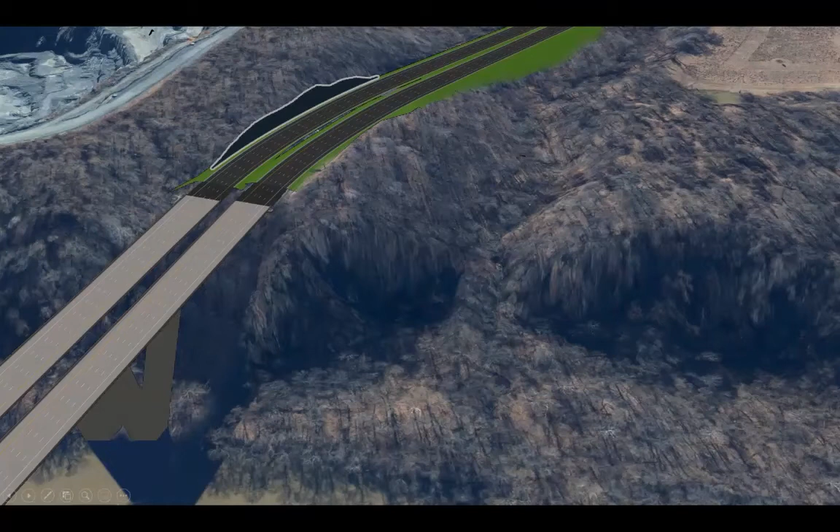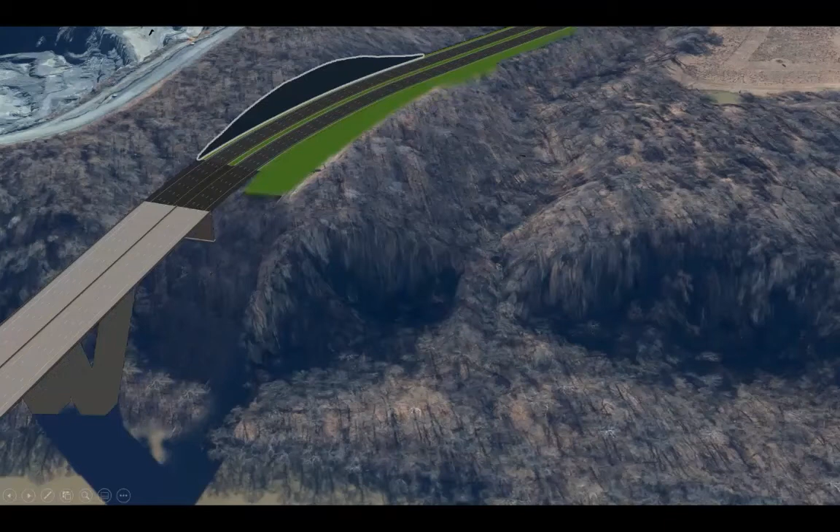To rebuild it, we had two options we were looking at in this image. One is to basically do a bridge where you replace it in the same place where the existing one was—that's a dual bridge, and that means you can stay a little closer. The other option, more simple and probably what they'd end up doing if I had to guess, is to just replace the whole thing to the side. Then the thing they have to consider is that it's going to be a bigger wall.

So you can show people, in very early planning, different options. And this would be focused towards agencies, really.

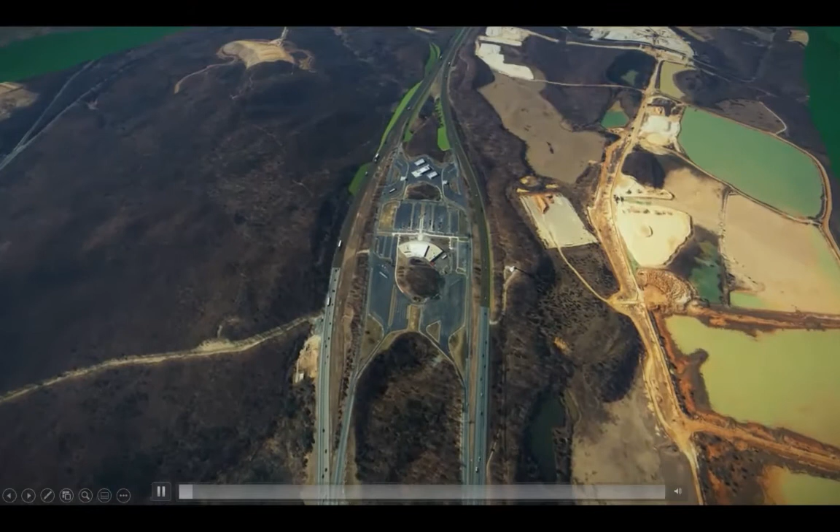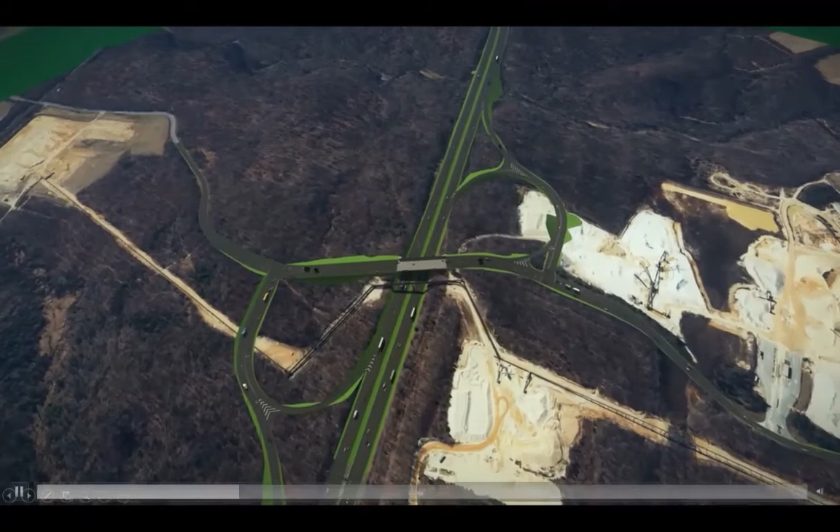So now, this is another example of reality mesh and interchange, but this time in animation. This was modeled with Concept Station. I think at the end of the day, it's going to be used more and more in planning to iron out alternatives that are visually and politically acceptable, because it's very good at putting the stripes and intersections together, and your bridges have pretty simple methods to put them in here.

It turns into a lot of work if you think about it, instead of just saying, I'm going to throw VisSim on this whole area, and then I can do what I need to do, and the cars will always be moving in a nice way. Of course, if you only had to show a straight-on view, they do have varying speed and different things like that. But when I tried to work out how to do these diverging points where decisions have to be made, that's not what LumenRT can do by itself.

So we'll let this guy finish out and just show you - this is Concept Station again. It's got really good standard creation tools and all the basic elements you would need. So really, for a transportation planning project, it's a great tool to use when you're looking at different options. We are using it with some of our clients, but it still isn't an industry standard for planning or anything close to that, which it could be. It could be more, and I think it will.